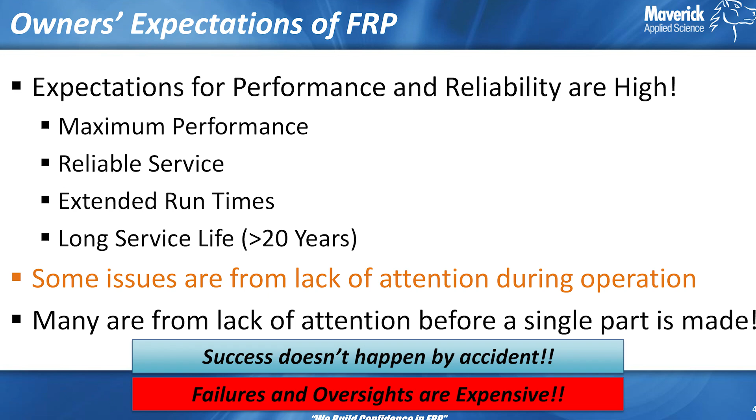So start with the obvious here: expectations of performance. Just want to do some background. Since 2020, the need to stay operating, the need for reliability, seems to have increased. But for a time there, you guys were skipping outages like crazy. You didn't want to come down, so you just ran your plants hard. It seems to have corrected itself a bit. There are several failure investigations that we were in pretty consistently when the outages were being skipped.

But running hard exposes reliability issues. When the products are brand new, often there's no worries. But if you start seeing issues in year 5, year 8, year 12, when you're expecting 20, 25, well, you're probably running it a little bit too hard. Maybe you skipped some steps in specifications or engineering. Some failures are just from lack of attention during operation, I'll admit that, but many are from lack of attention before a single part is even made. Failures, leaks, lost production, it's not acceptable. Can't be tolerated. When we see the earthworm piping, the patchwork repairs on your sites, that shouldn't be seen as normal or okay.

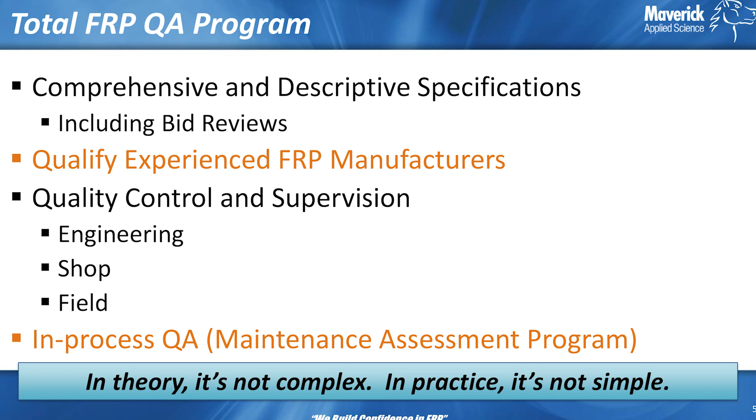Plants that run reliably are not lucky. They have a plan and they follow it. It should go without saying that failure and oversights are expensive and should be unacceptable. So here it is. I actually gave this talk last year, the Total FRP QA program. I'm not repeating it, but I'm showing this Total FRP QA program that we are harping on a lot. Pretty much every time you talk to me or Jeff, if we come out to your site, do a lunch and learn, we're preaching this FRP QA program. So the purpose of this presentation is this QA program in action.

Like I said, it's not rocket science. You want good specs, including bid reviews, work with good manufacturers, and then QC and supervision. Your mind first goes to shop QC, but there's more than just shop QC. There's QC throughout the process, the engineering QC. Who's doing the design? Who's reviewing the design? Are you capable of reviewing the design yourself? And then, of course, you have shop and field QC supervision. And then do you just flip a switch and never look at it again? Or do you have a process for checking out your systems, whether it's tanks or piping?

Can you track performance to where you can actually do some sort of regression study and track your performance to try to get out ahead of issues and be proactive on them as opposed to being reactive? So in theory, it's not complex. This is pretty simple stuff, but in practice, it's not that simple because who checks all those boxes? That's a lot of different facets of the project. So who checks all those boxes? It's very rare to find somebody that can actually do all of those.

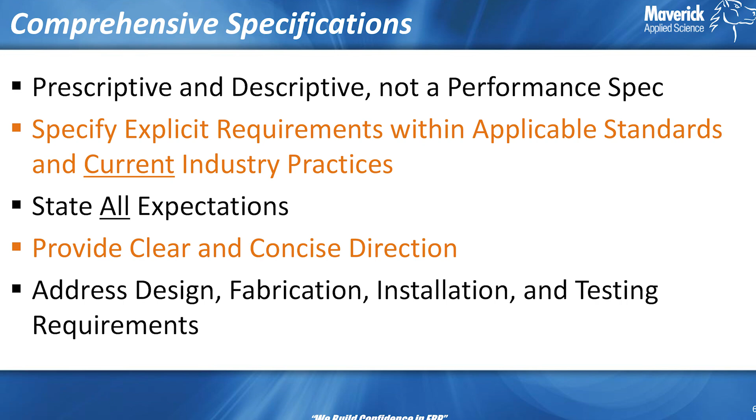What we ended up seeing in a lot of your specs is just a smorgasbord of standards, and every single FRP specification, standard, code known to man is in your specs, and you just hope one of them sort of fits what you're doing. But that creates a lot of vagueness and a lot of open-for-interpretation standards and calculation equations, because they all tend to say something a little bit different. State all expectations. Anything left to chance is out of your control.

So here's your chance. We talked about materials, defining what your corrosion barrier thickness is, your veil, your surfacing veil material. That's where you define your flange construction. That's where you define the acceptable joint types and how you're going to handle that. Don't leave questions to be answered. If you're not providing clear and concise direction, you're going to get a ton of clarifications. You're probably going to get a ton of RFIs, requests for information, and likely a fair amount of exceptions as well.

And each project is specific. There is a lot of boilerplate information in your specifications. Design parameters change, how to test changes, configurations change, where you need to actually have a unique spec for each individual service that you're doing, each individual tank that you're installing. If any of these get skipped, it's usually this, where you're not qualifying experienced FRP vendors.

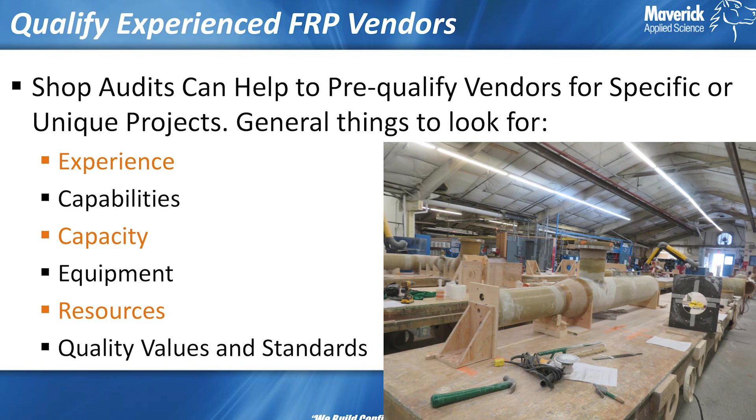So here are some of the general things, just reading through these. You want somebody that has good experience for what you're doing. Are they capable? Do they look like they have it? Are they convincing you just by talking to them, by visiting their shop? Are you convinced that they can handle the piping system on your project? Are they set up for pipe? Jeff was talking about the shops earlier. Tanks, you need a lot of open space, and piping not so much. So does it look like they're set up for pipe?

What does their jigging look like when you're walking through their shop? Do they have experienced pipe fitters? I don't want to harp on the 20-year-olds, but it's better to have 20 years of experience for pipe fitters than just a lot of eager young guys. You need some of the old hands and the guys that have done it before and seen it all.

So specific things to look for when we're doing shop audits. Ideally, you want to do these shop audits in person. You want to look for their shop and employee certifications. Do they have them? Hopefully. What are their engineering and design capabilities? Do they do a lot of their design in-house? Do they farm it out? Do they do maybe just standard stock calculations? How good are they at doing unique configurations or unique systems?

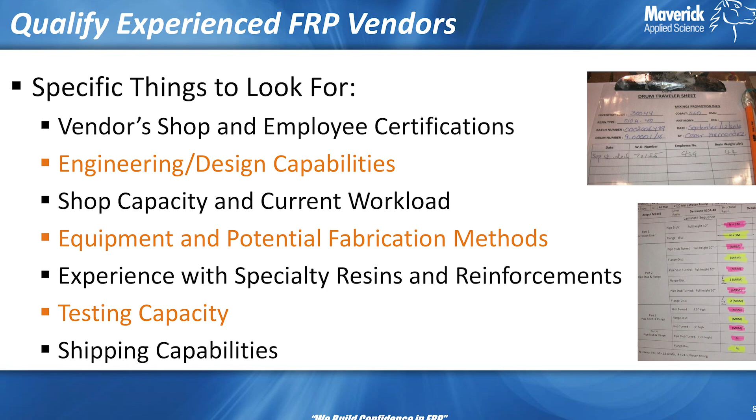What is their current shop capacity and current workload? I would say if you go into any shop in the US these days, it's going to be very booked up and should be very busy. Are you impressed with their facility? Is it modern? Is it clean? Do they have experience with specialty resins? Do they make the resin dance?

I think Jeff was talking a little bit about it yesterday, one of the 4 Jeffs, about the different temperatures. If it's too cold, you do this with the resin. If it's too hot, you do this with the resin. So can they do that? Or are they trying to do the same thing in every single situation, and if they run into trouble, now they call the resin manufacturer? Ideally, you want the guys that know what to do without consulting them, because that proves that they've done it a while.

What is their testing capacity and shipping capabilities? This goes for both pipe and tanks. I'm getting into tank versus pipe now. So tanks are largely standardized, especially flat bottom, dome top. Many non-FRP guys can pick up RTP-1 because it has a lot of good cookbook rules and equations. So a lot of non-FRP guys can just read it and figure it out for a pretty standard tank.

Well, with NM-2, it's made it a little bit easier, but it's still not quite there. If you don't have any experience with FRP pipe stress analysis, you're not going to be able to open up NM-2 and teach yourself. It's just not going to happen. You hear the phrase, you've learned enough to be dangerous. That's truly where you're going to get if you're just opening up NM-2 trying to do pipe stress analysis or pipe design without any guidance.

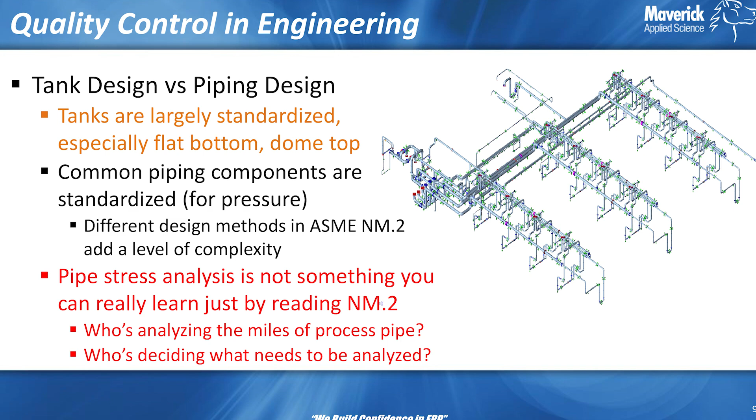Jeff talked about the different design methods. I'm going to show an example of the different design methods in practice a little bit later, but like I said, it's not a how-to manual. Even load combinations are a little bit vague in NM-2.

So engineering is a valuable resource, and everybody's pretty busy these days, and we are not big enough to do your entire plant design. So what are you forced to do? Who is analyzing these miles of pipe? It's the steel guys who have a bunch of steel on the project, and some FRP is thrown in, so they've got to do the FRP. Well, if they're just trying to read NM-2 and figure they can do FRP, it doesn't work that way.

But it's hard for engineers like Maverick to sell engineering to engineers. We're a prideful sort. But in your specs, you guys can force them to do that. You can tell them, thou shalt go to Maverick to do the non-metallic. You can go to somebody who knows what they're doing. You have the ability to do that.

The other thing that's interesting here is, who's deciding what actually needs to be analyzed? There are vague rules in NM-2 about when you should do a formal analysis and when you can do a simplified analysis, but it's not like this temperature and above you do an analysis, this pressure and above you do a detailed analysis. There are combinations of the two. It depends on critical service. How worried are you about your system? It could be pretty mild pressure and mild temperature, but it's a critical service to keeping your plant running. So that goes up in priority to where I want a formal analysis on that one. So who's actually deciding this?

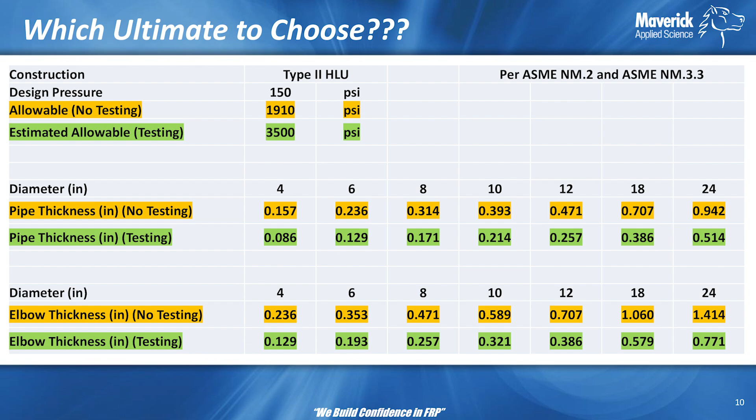But just an example here, I'm showing pipe wall thicknesses from 4-inch diameter to 24-inch based on the different allowables, whether you're doing no testing or this is my estimated allowable from an actual test.

And the math is just linear. So the ratio difference between what I'm saying is a 3,500 allowable for the testing versus 1910 for no testing, whatever that ratio is, it's almost 2-to-1, is the difference in what the thicknesses need to be. So that's pretty dramatic thicknesses, one for cost, but also for me doing the analysis. If I want to assume my 24-inch pipe is 0.942 and you're telling me it's actually going to be made at 0.514, that's a pretty big difference.

Elbows the same way, they get a little bit thicker. It ends up being about 50% thicker than the pipe. So you can just see the magnitude difference, but also at the same time, you do see the benefit that NM2 is allowing for doing short-term tests. It's going to allow the manufacturers to be much more competitive without losing reliability.

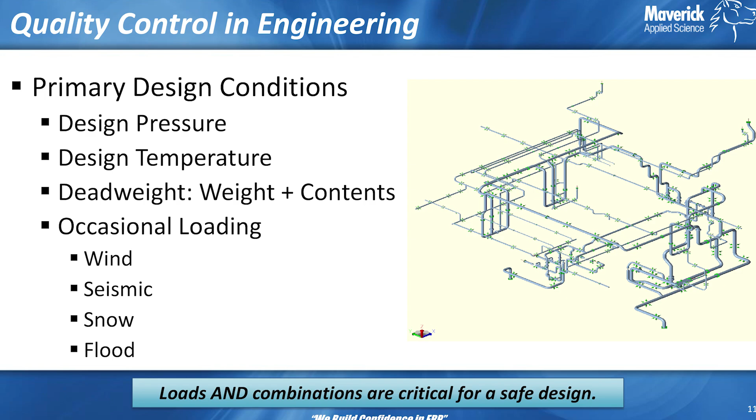So QC and engineering, the important thing here, and the load combinations are not found in NM2 unless I'm overlooking something. When we analyze FRP, temperature is a sustained load. It is a normal operating load. We do not get to consider an expansion case and consider temperature by itself, because temperature is one of the biggest things we're worried about, right? It's the expansion. So that has to be our sustained load, because that is how your system is operating. We don't get any benefit of a secondary stress or relaxing or creep, because we don't have that ductility that steel does. So from this, understand that thermal has to be part of the sustained case.

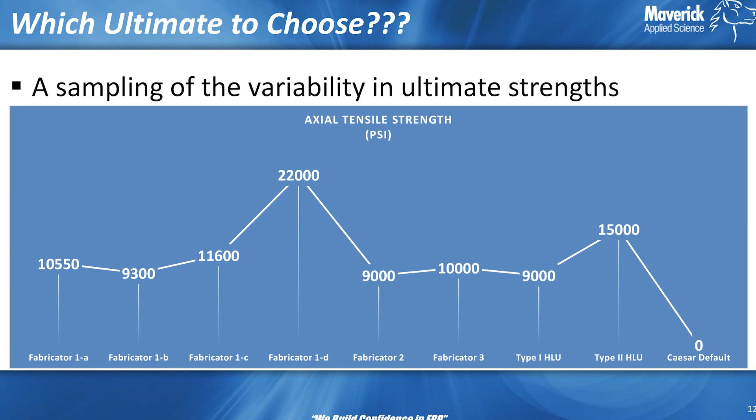So here's just a sampling graph of various manufacturers' published data for ultimate strengths. It's all over the map, you can see. Some as high as 22,000, but a lot of people are using Caesar for their flexibility analysis. They don't have an allowable. So they say, okay, Mr. Manufacturer, what's your ultimate strength? Or I'm just going to go online and look at different products, and I'll just throw a dart and choose one that seems to work.

So after seeing all this variability, how confident are you actually in the allowable stress? That's where the benefit of doing the method C testing per NM2 gains you an actual real value that you don't have to guess at. But can you trust the engineer who's only doing FRP once a year to know which allowable to choose, or even to know to ask that question, that there's different allowables out there? So there's no silver bullet.

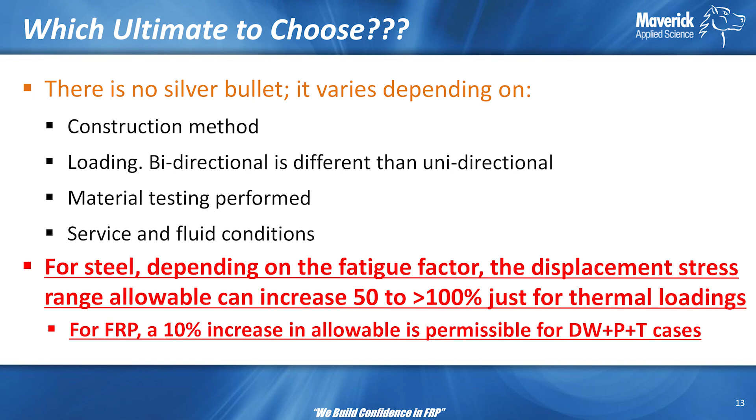This is sort of a summary of what NM2 is doing now, where the ultimate depends on the construction method, whether it's type 1, type 2, filament wound, what loading is on it. Bidirectional is different than unidirectional, and what type of material testing you're doing to prove your product. Here I'm showing an example of the thermal expansion case for steel. Their allowable actually bumps up almost 50, and sometimes greater than 100% just for thermal loadings alone, whereas we have a modest 10% increase, and that's in combination with dead weight plus pressure.

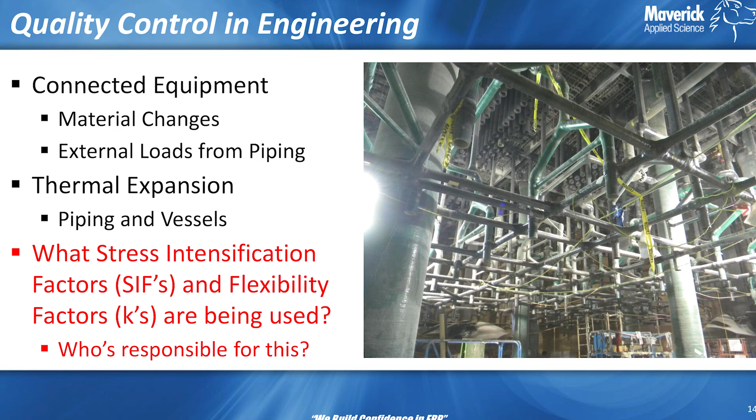So other things in your purview, you have scope changes. What is the effect on one another? Talked about that yesterday with the external loads. What do you do at that nozzle connection? Material changes. Sometimes you're connecting to a steel tank. Sometimes you have steel pipe connected to an FRP tank. Paying attention to thermal expansion in the piping in the vessels. What is the SIF? What is the K? So this is very, very important for an FRP stress analysis. There's not one cookie cutter, one size fits all approach for this.

There's even more of a can of worms on axial direction versus hoop direction. We can talk about that later. I'm not going to talk about that now. But I mean, who's responsible for this? This tends to be a little bit of a black hole that NM2 is trying to solve, but it's still a relatively new standard, so there's still things that we're learning.

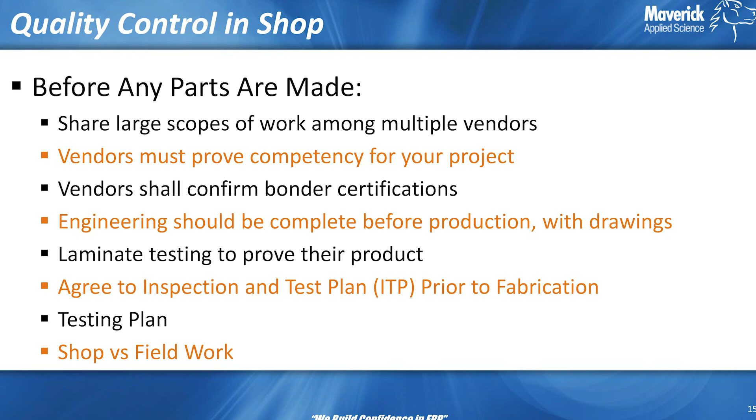Laminate testing definitely helps to prove their product, and we've talked a bunch about the ITPs and different testing plans, and then also determining any shop versus field work. Where are you hydro testing it? Are you asking them to do that in the shop? Is it going to be in the field? What can be done? I said yesterday, the best field joint is one that you don't have to make. So plan your project accordingly to do as many shop joints as you can.

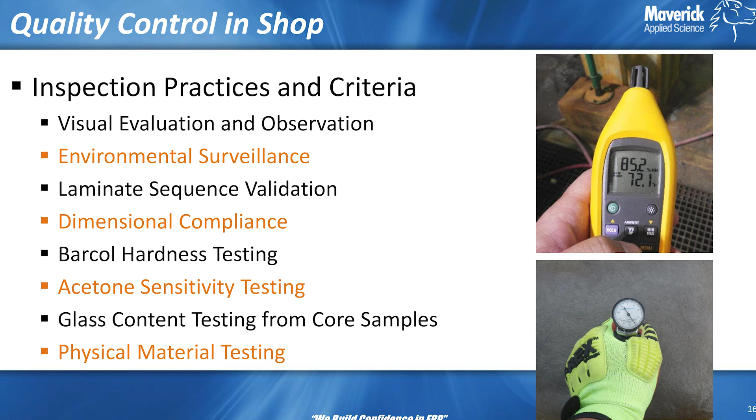Just real quick, not going to dwell on this, but the different types of QC practices we're doing when we're going into shops, whether it's piping or tanks, there's slight differences for each one. The environmental surveillance we talked about, reading the dew point, making sure they're using the right glass. Is it conditioned well, or are they letting it just sit in the open shop there? Making sure the dimensions are good, doing Barcol hardness testing. This is similar to the Shore hardness testing that Rob was talking about, but it's a different tool for that. You can determine glass content from core samples, and you can also do physical material testing to prove the product.

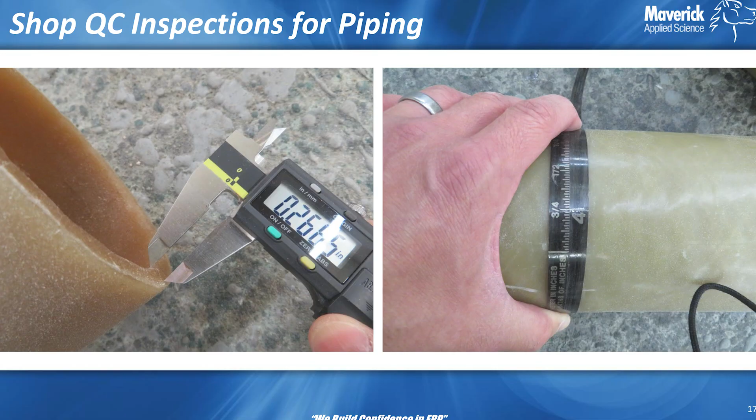Getting into the actual part of the presentation, where we're doing some practical discussions here about why pipe tends to be a little bit more difficult than tanks. All right, you can measure the thickness of the pipe, no problem. Here we're measuring the corrosion barrier thickness, that's easy to measure. You can measure the OD of the pipe. Why would you need the OD of the pipe? Because the OD changes, as Jose talked about in the last presentation. That OD is very, very important to us when we're designing pipe supports. So we need to measure that on every single spool. Hopefully it's a pretty controlled process. If it's hand layup, it may not be as controlled.

How do you look inside pipe? You can get inside tanks, no problem. You can look at every square inch of the corrosion barrier on a tank that was just made. Piping, not so much. So that's trusting the manufacturers. You can send a bore scope down every single pipe in their shop. We don't do that. You want to make sure you're working with people that you trust, that are making good product. You watch them while they're doing it, understand their process.

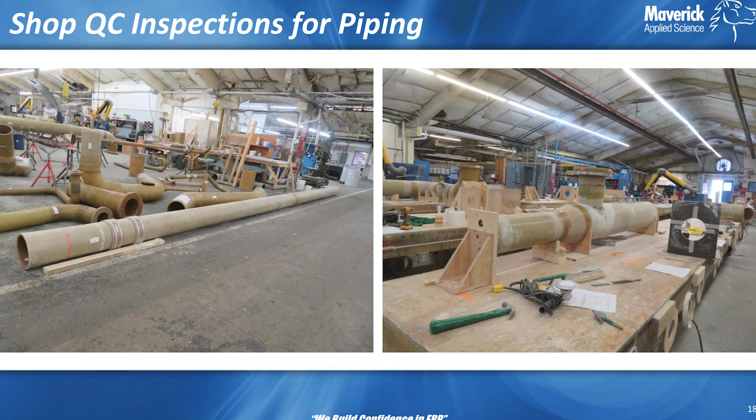Okay, so now we're looking here. That's a lot of individual spools that are sitting down there that have just been made. We're used to just one big tank to look at, right? If we're looking at just a surface area comparison, looking at a tank is very, very easy versus a bunch of different pieces of pipe, bunch of different components. You have to check overall dimensions. You're checking alignment, flange squareness. Are the flanges two-holed? Are they going to bolt up to whatever they're supposed to bolt up to?

Are the supports and joints laid out with consideration of each other? Does the person making the pipe know where the supports are supposed to go? If they don't, then you're liable to get a joint where a support needs to go. So you need to pay attention to that. And you can see on the one on the left, you have shear collars there that are pre-installed. So this manufacturer knows where the anchor support is supposed to go. So there's some good cohesiveness between the engineer and the manufacturer on this one.

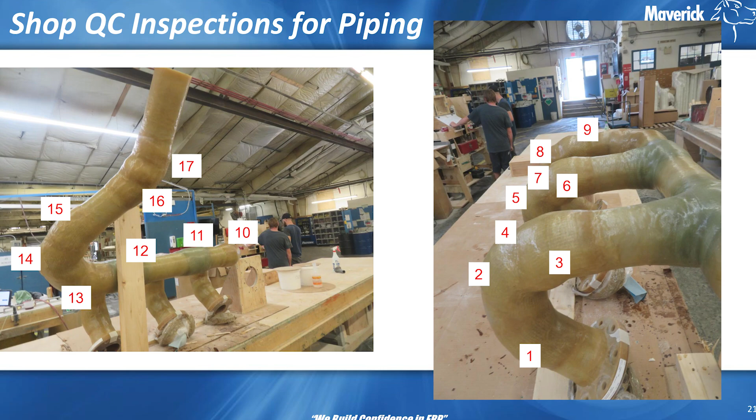But what I want to show here is just counting this up. In this one short section, 17 joints in this small spool section. Add on to that the flange alignment and the squareness and the two-holing. That's a lot of potential issues just in this one little spool. Well, there's also probably 50 to 100 spools that they're making. So multiply that by the joints.

There's so many joints, so it should be starting to make sense to you guys where the potential problems are, why you have nuisance leaks, just because there's so many potential leak points here. It just takes one bad one, and now you're going to have some issues. So that's why you've got to make sure you're working with good guys and have good specs, good procedures. Remember this slide.

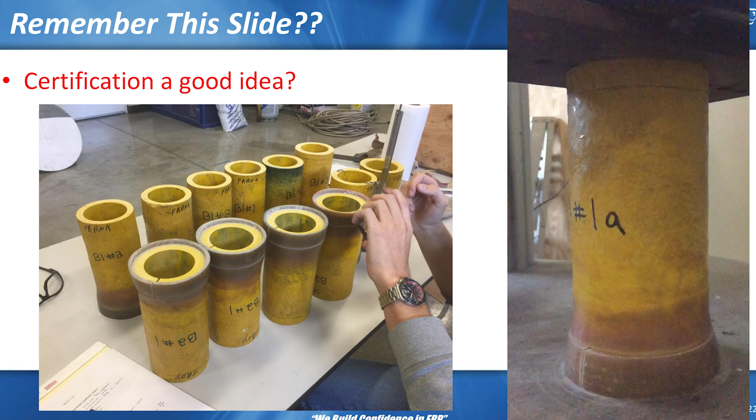When you present three times, you have the benefit of being able to sort of tell a whole story and reinforce the message and have callbacks to things that are important to you. But would you like bonder certifications now when you see 17 joints on that tight spool on the last slide? I would say bonder certifications are a very good idea to make sure that all those joints are done well.

Because we're not inspecting 100% of the manufacturing, of making the spools, of spooling it together. We're not looking at all that. And I don't know that their QC guy can really look at all that either, because there's just so much going on. So you look at joints, maybe before the preparation, maybe after a stage is on or after it's done. But there's not 100% surveillance on that. So in a lot of respects, you're just trusting your bonder.

All right, so it's been made in the shop. Definitely has its own challenges, but installation is a different animal. Shop is difficult, but field is completely different. It's many of the same challenges, but then you have a few more added in. It was talked about yesterday, access to the joint. I think Jeff mentioned that. You have to navigate structural steel to get in there. Do you have room to do the welds? Do you just have general access to it? Not even talking about fit up and trim and supports and flanges.

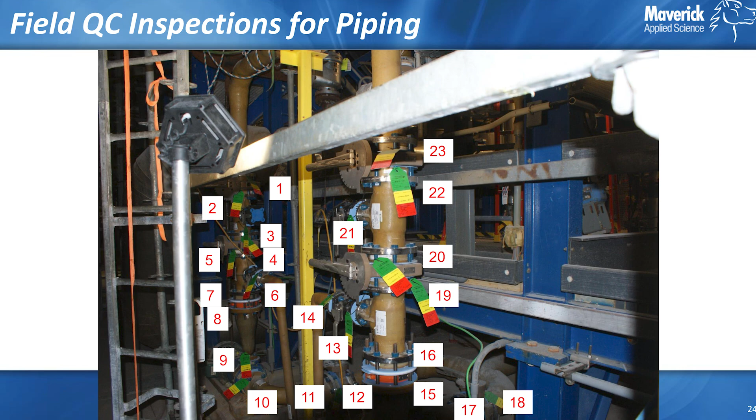And now imagine dual laminate trying to do this. That's just another wrinkle on top of that. So all of this is building the case for, you guys should be understanding, okay, that's why I need to pay so much attention to this. Getting a little bit deeper just to illustrate this. You see all those tags? Well, those are all flange connections.

More numbers here, and keep on going. I counted 23 from what I could see. There's more than 23, some hidden by pipe, hidden by steel, scaffolding, whatever. But 23 flange connections that they have to bolt up, torque up, do it in sequence, come back an hour later. So you can imagine that they might want to skip a little bit and cheat and go quicker and not follow the proper procedures if you're not paying attention to them.

Remember, this is just one small section of this piping system. You would look at this in operation, just walk by it. You wouldn't give it a second thought if you saw a system like this walking through your plant. But there's so many things going into installing them that could potentially go wrong, so we need to pay attention to those.

In comparison, installing a tank is much more, I would say, logistical when you're installing a tank on a site. You set it on the foundation, you anchor the hardware down, you connect the piping equipment, you have some flanges, not a ton of field joints. So honestly, you don't need as skilled FRP labor when you're doing tanks.

But if you had a tank with, let's say, 100 flange connections, or maybe 50 joints to do, or 200 supports to put off your tank, that would take a lot more effort. That would take a lot more expertise with the FRP guy. But that happens in every single piping system. Tanks are, by and large, a lot easier to install.

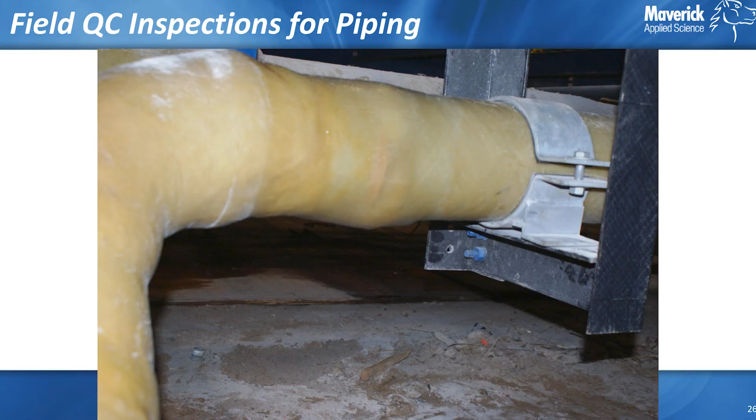The old saying, there's never time to do it right, but there's always time to do it twice. I hate that, as an engineer, but a lot of people would bypass that to go very quick to get those 23 flanges torqued up just to move on. But what's the potential cost impact of not doing this? So joints, they're installed, great. Flanges are torqued. We're good, right? That's it. Well, now we have more. We have supports to deal with.

Jose gave a good talk if you were there at that last one. I mean, the need for shear collars on anchors, the need to set your gaps right, the need to anchor your supports down on the ones that need to be anchored down. This is all implementation of analysis. Tanks, they don't have to deal with this for the most part once it's on site.

You better have someone installing who knows what the supports are there for. Do they know where the right supports are supposed to go? You can't just indiscriminately add supports anywhere you want just because it was the nearest shoe you could see, so you're just putting it on this pipe.

So you can see that one fits pretty well, the need to have a good fit to the OD. But let's say this was supposed to be an anchor, and you forgot to put shear collars on it. All that front end work with good specs, good manufacturers, pipe stress analysis, it's invalidated because that thing's going to rock back and forth when you have a thrust on it.

The other thing I wanted to mention here is about trim allowance. Most systems come with about 3 inches of trim allowance on the end of the pipe. Not everybody likes to cut off that trim allowance when they're installing because that's an extra step, right? So you start at one point, you leave the trim allowance on one, and then that'll sort of add up down the line. So you need to work with people that know what they're doing, because you're stressing the pipe more than you should if you're not taking out that trim allowance.

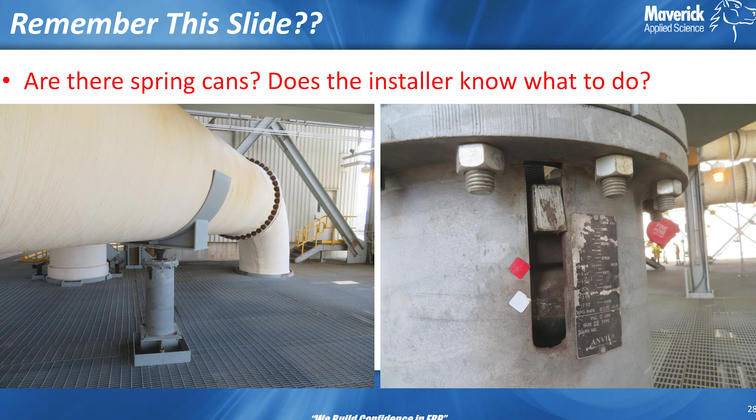My final callback here: you have this real good savvy analyst. He specified spring cans. They're perfect. His system is perfectly optimized inside of his computer. But now it's on the installer. It's on the plant to operate correctly, the plant to know what to do during shutdown when you're emptying the pipe. Remember, this was the one yesterday where they unloaded that spring, they lost their cold load, and it opened up their spring and moved their pipe. So that's just another element if you're throwing spring cans in there.

So hopefully I didn't scare you guys too much, but hopefully I conveyed enough of the challenges, the different variables going through the process that are all controllable. They just take effort. They take time. They take money. They take engaging the right people, not doing it as fast as you can, not treating pipe like it's just some simple material you're buying off the shelf, sticking in the pipe rack, bolting it up as quick as you can, and just turning on your pump and letting it go. Can't do that.